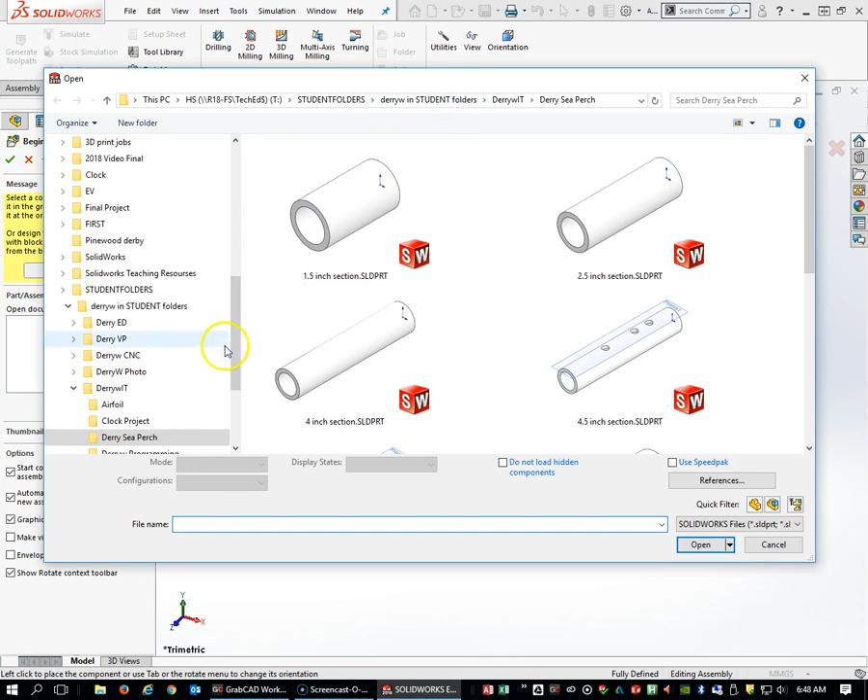So we're going to hit the Browse button and find our folder in our student folder. Get to your student folders, find your name, and find your IT folder and your Perch folder, and hopefully you've stored everything and named everything appropriately within this folder. Alright, the first piece that you bring in is going to be a base fitting, or base part rather.

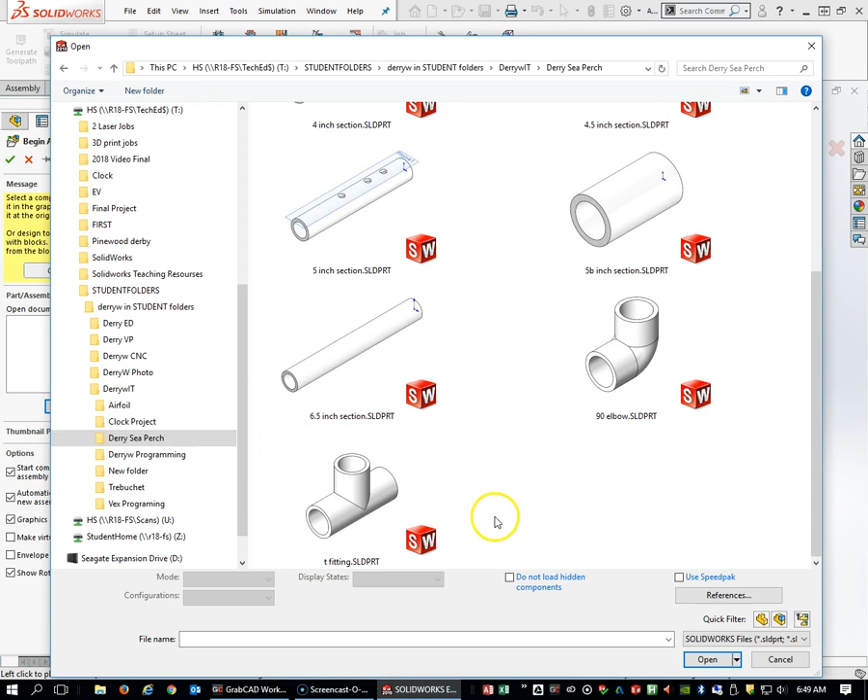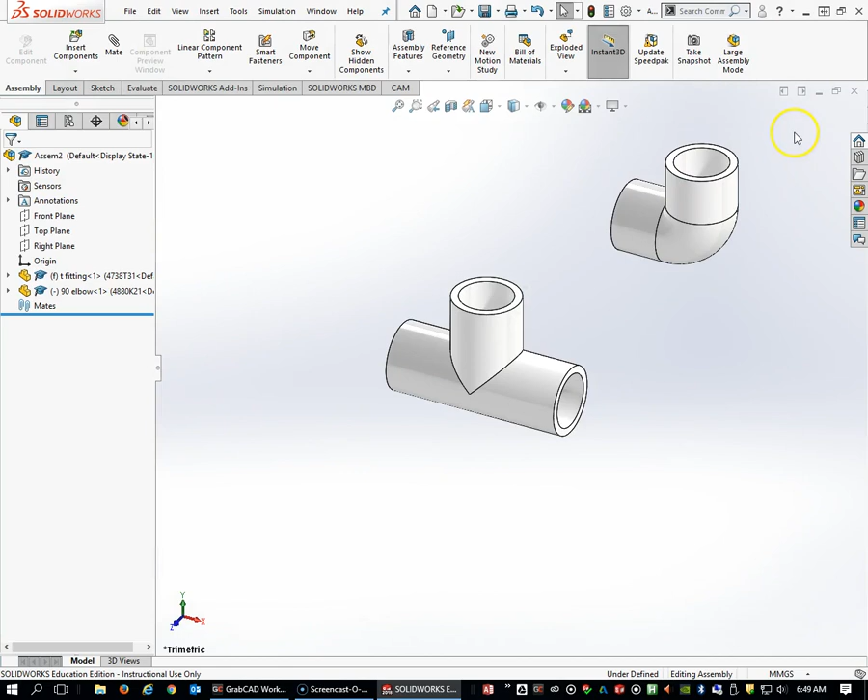I'm going to go ahead and pull a T fitting in to start. And if I hit this green check, it's going to place it right on the origin there, and I'm good to go. We can now bring in some additional parts, and to do that, if we hit the Assembly tab and hit Insert Components, we can select our elbow.

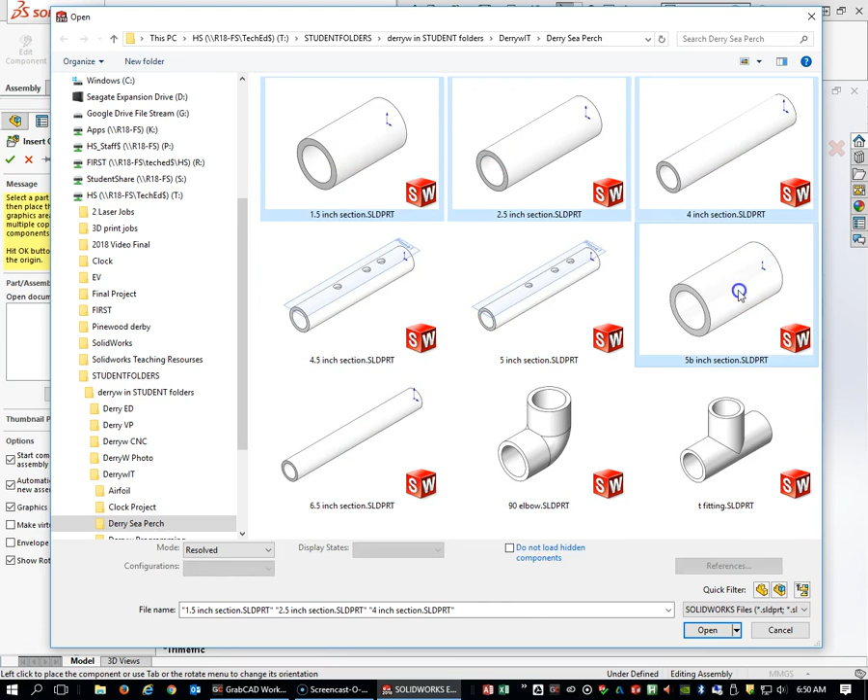And again, I'm going to click and hit the check, insert some more components. We need the 5-inch section. As a matter of fact, if you want, you can hold the Control key down and select all of these. And I'm going to hit Open.

And now when I click, it's going to pull each of these in. I should have all of my parts.

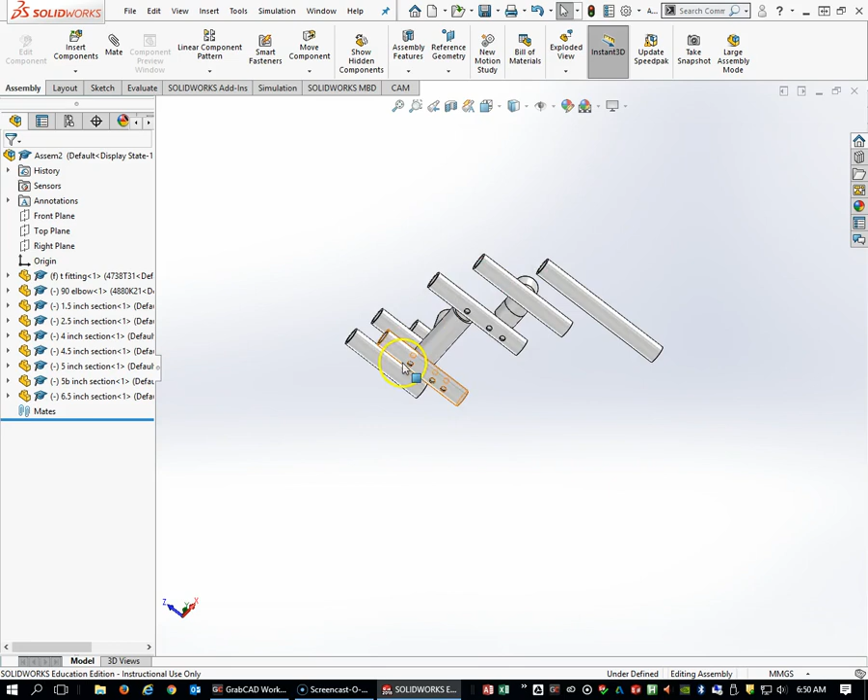Alright, let's take a look. I've got a 4.5, a 5. I think I may have accidentally pulled in the 5B, which I was giving a demo on, so I'm going to delete that one. If you accidentally pull something in that doesn't belong, you can delete it.

Let's take a look at the list to make sure that we have everything that we need, and I'm going to compare that to our PDF. Suggest, if you haven't done so, to go into Canvas and download your Perch PDF so we can see what this thing's going to look like fully assembled. This picture here shows us all of the parts that we need and where each of the parts goes, so I think it'll be easy for us to use.

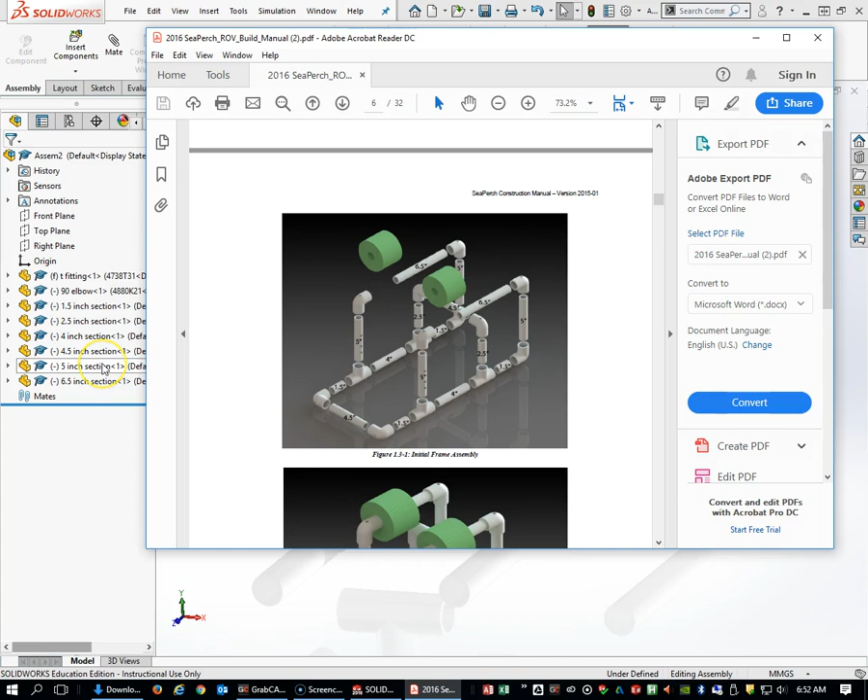So we have 1.5-inch parts, I have those. We have 2.5-inch parts, I have those. We have 4-inch parts. 4.5-inch parts are these, and then we have 5s. There's two different 5s. We have 5s with holes and 5s without holes.

I'm not sure I did that. And then we have the 6.5. So we may need to make another 5 without the holes, and I can show you how to do that if need be. Alright, so it's important that when you created these parts you name them correctly, because it's going to make the assembly go that much easier.

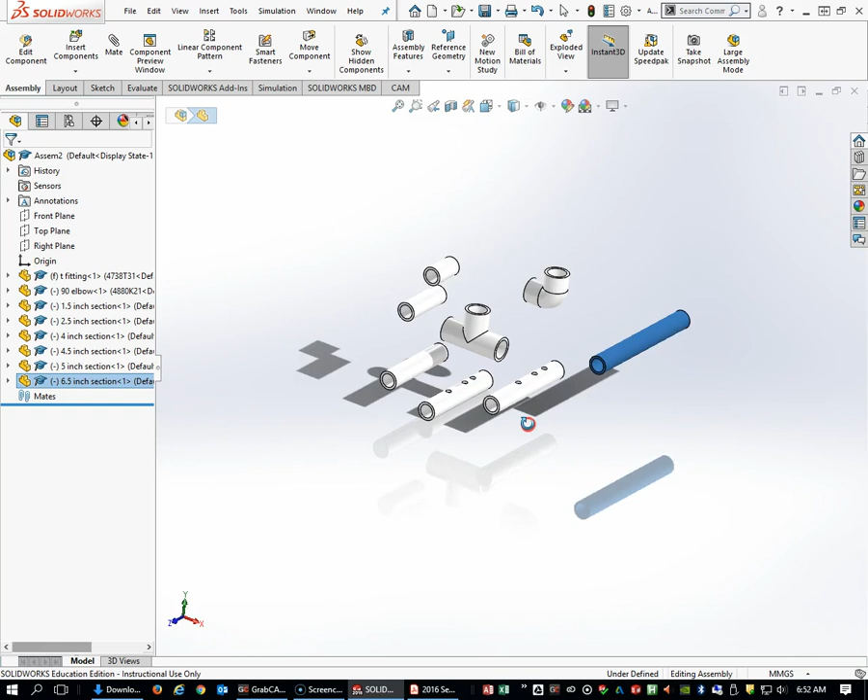Alright, going back to, let's start with these T's on the bottom. We're going to have 1.5 inch, a T, a 4, a T, an 1.5 inch. So let's go ahead and build that and see what that's going to look like.

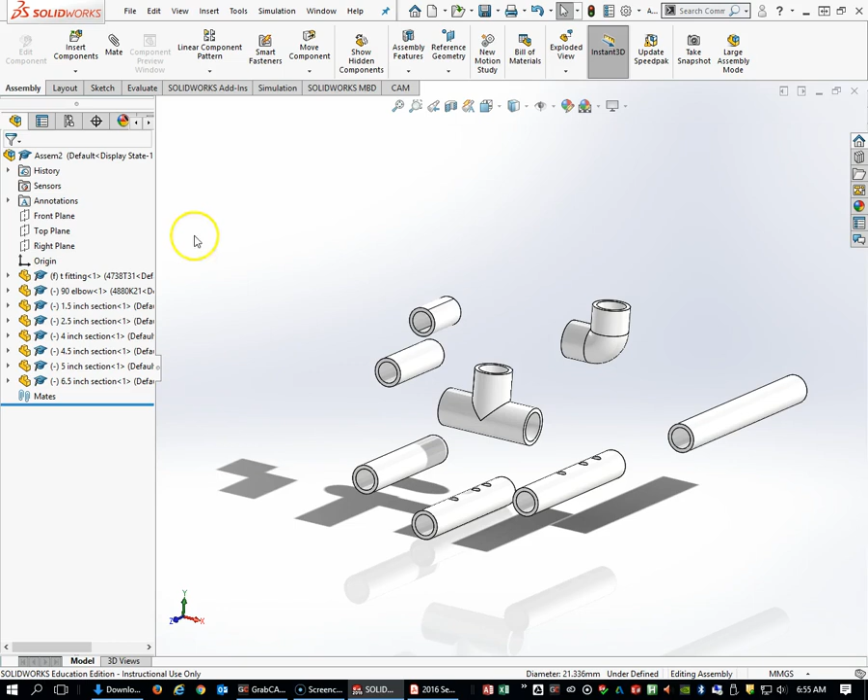Okay, you're going to go to the Mate command. Make sure you have nothing selected. You can hit the Escape key. And we're going to go to the Mate command, and once this comes up, Solidworks will automatically understand in most cases what kind of mate we want, so we don't need to necessarily select them.

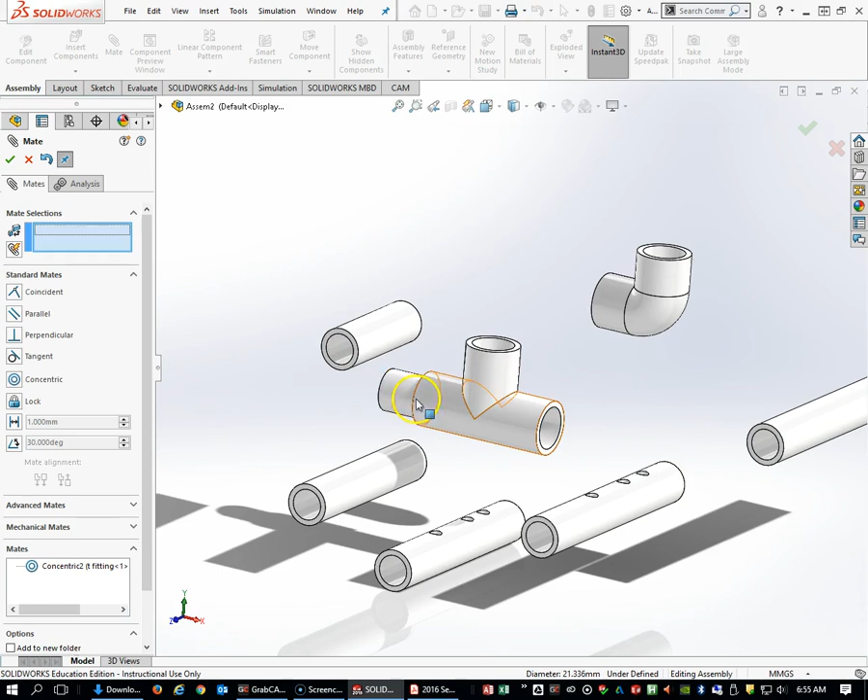If you see here, I've got, make sure this is cleared. If I select the outer part of this 1.5-inch section and then select the inner part of this, it automatically makes a concentric mate. So we're going to hit the green check here or here, either one. I'm going to select this one. And you can see that this part is now restricted to be concentric with that.

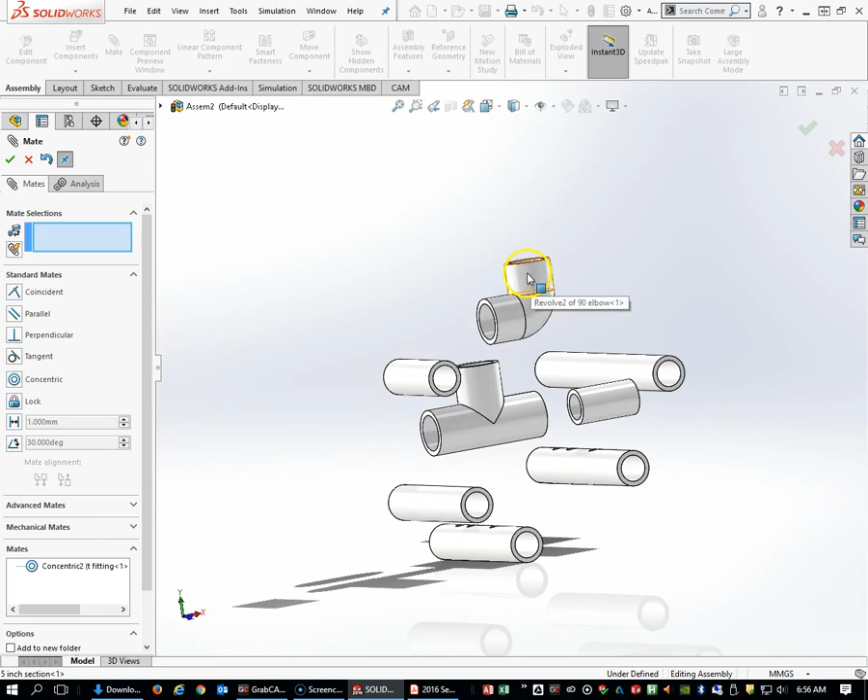Now inside here, there is a little stop in this fitting, and we can mate that surface to this surface here. Now for those of you who are new to SolidWorks, you should spend a couple minutes with the center button of your mouse, the scroll button. If you roll it in or out, you can zoom in and out on things. All right, and notice wherever I put my cursor, that's what I zoom in on.

Okay. If you hold that same button down and you rotate left to right, you can spin it in this manner.

If you hold the button down and move up and down, you can spin it in this manner. So a little bit of practice with that center mouse button is going to make you much more efficient at building assemblies, because you're going to need to rotate this thing back and forth.

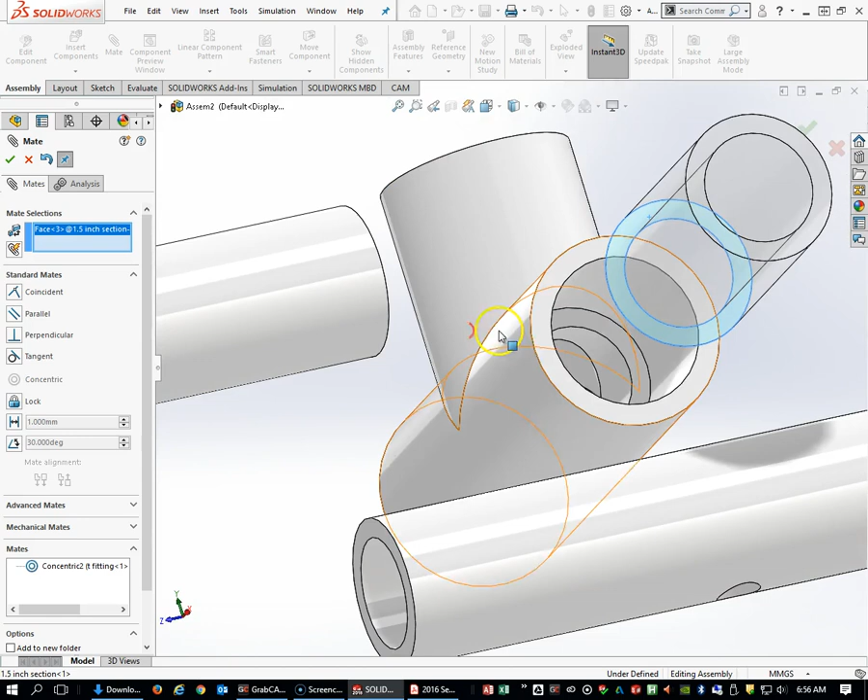Again, I've got this cleared. I'm going to come in here and grab this face, and I want that face to bump up against this face inside here. Okay, and I'm going to hit OK.

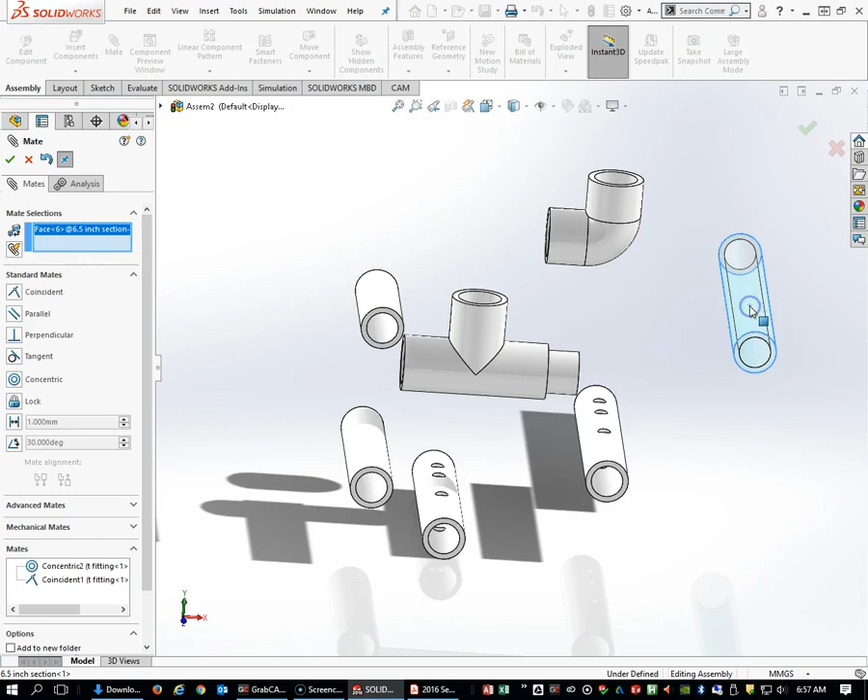All right, now I'm going to grab one of the 4-inch sections, which I believe is this guy. Oop, not that one, clear that. Oops, not that one, where is it? You know what? Clear out of here. Do I have it? There it is, okay. Go back to mate, clear that out. I want this section.

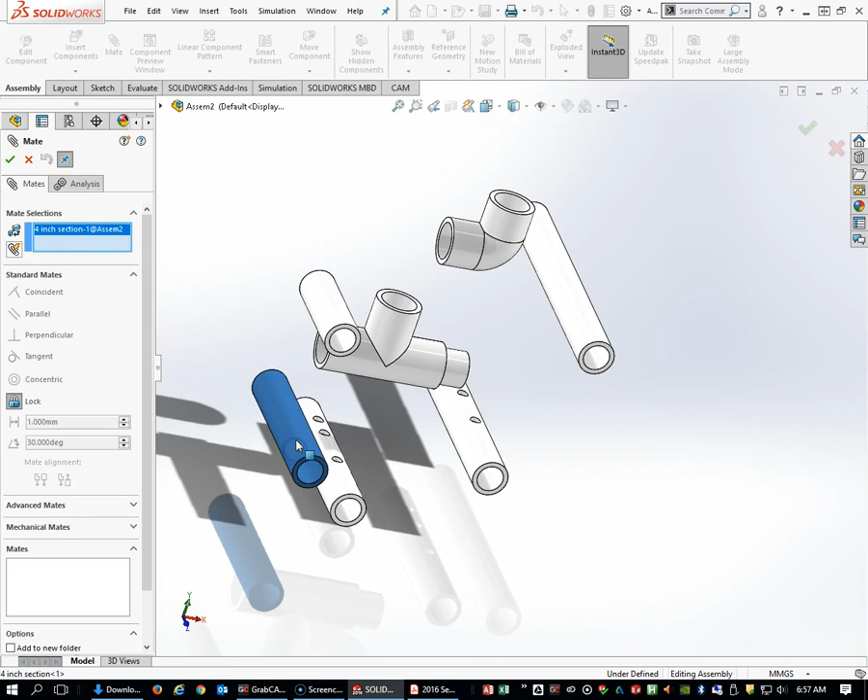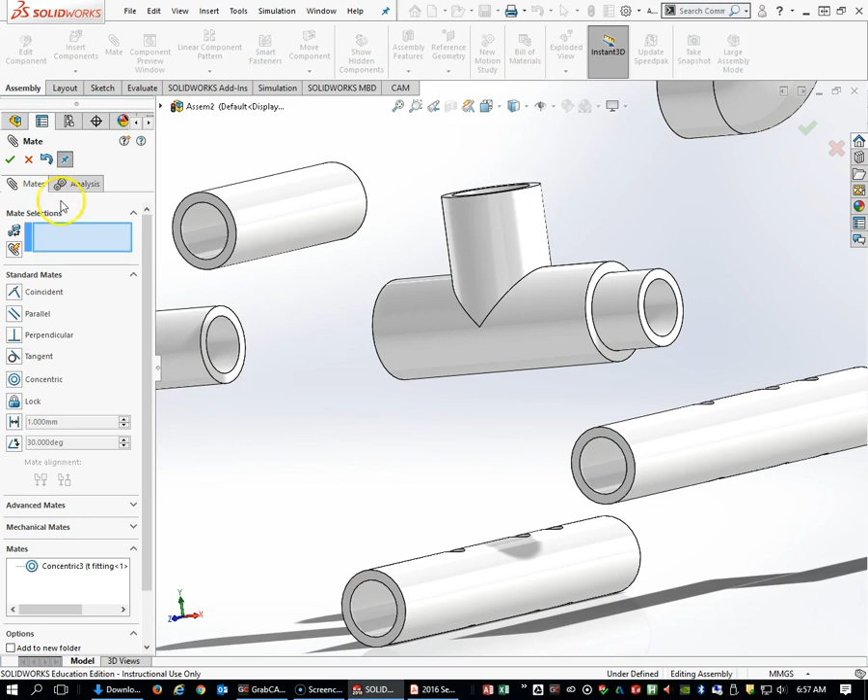Try that again. So I'm going to go ahead and tell it concentric. I'm going to select this guy. Go to here, hit OK. Once again, we want to mate those two faces. So I'm going to select this face, hit OK. Now you can see from our PDF document that we need more T's and we need more elbows.

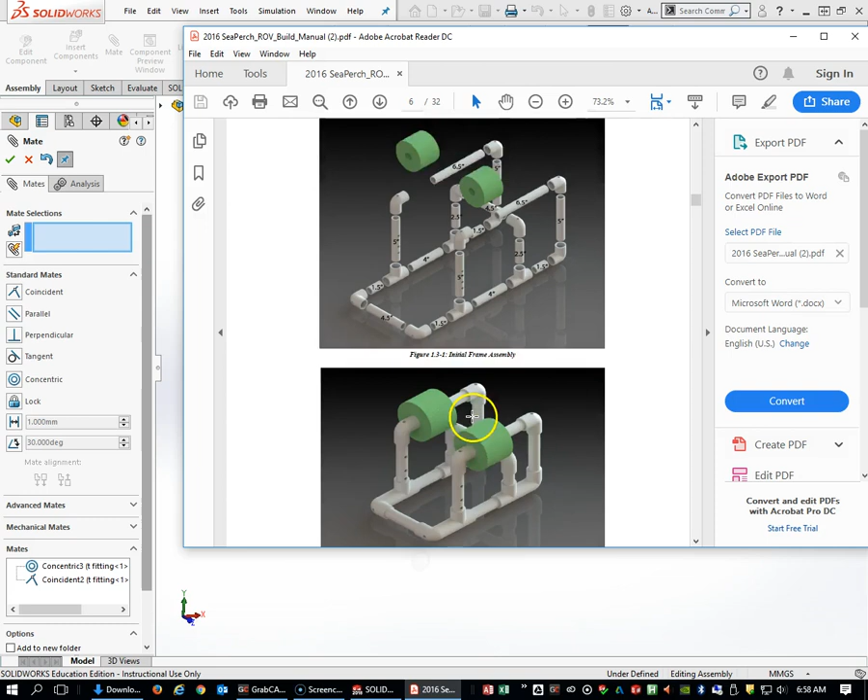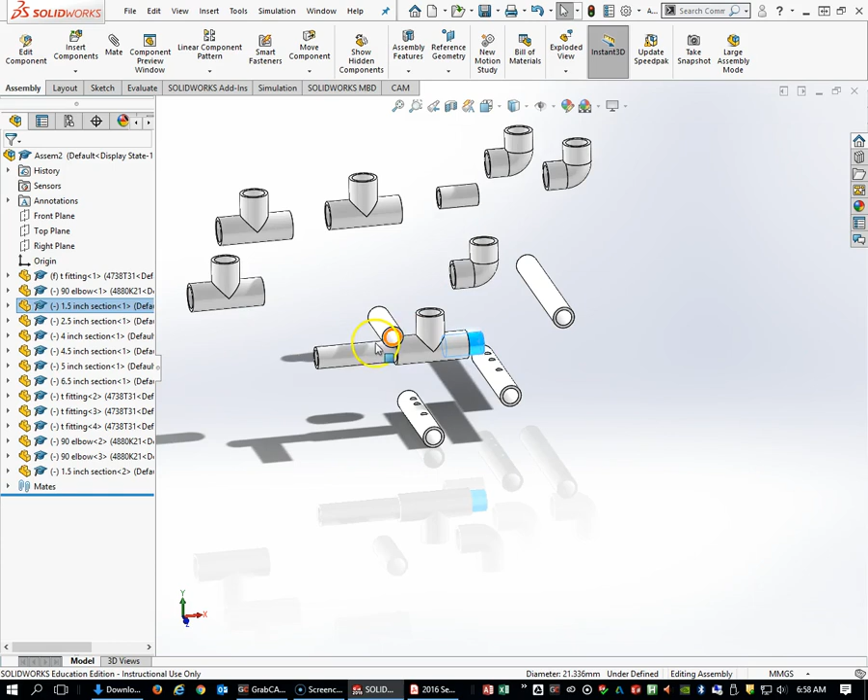Very easy to create some extra T's, I'll show you how that goes. Get out of my mate command for a second. If I hold the control button down and then click and drag at the same time, I can pull in a few more T's. I can do the same thing with my elbows, and with these, because we're going to need more of these 4-inch and 1.5-inch pieces. So just click on them and drag, and we can make as many as we need.

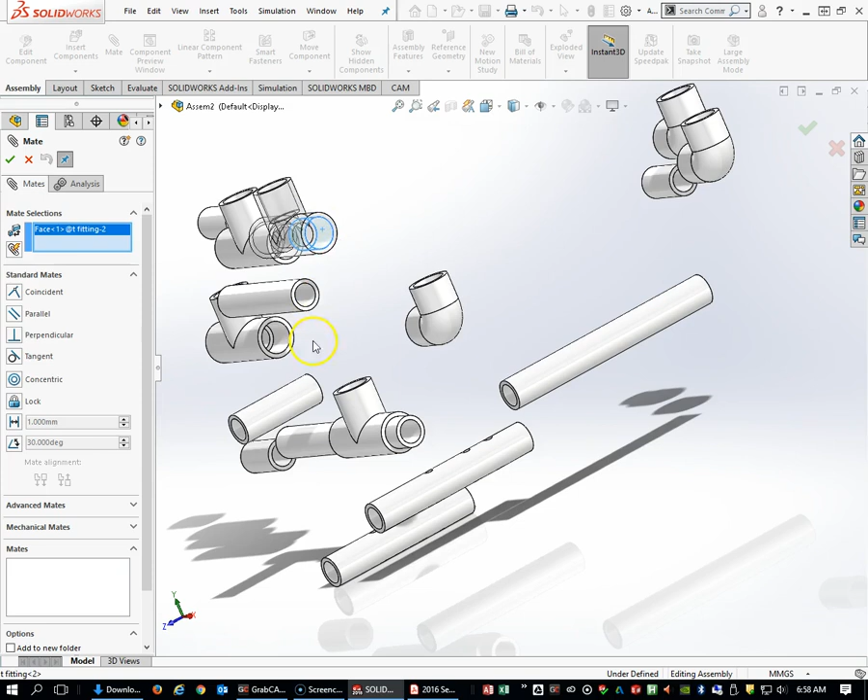All right, let's go back to putting things together. So I'm going to hit the mate command. I'm going to select this T. Select this, it's going to do a concentric mate. Once again, we want to mate up those faces. So I'm going to come inside here and select this.

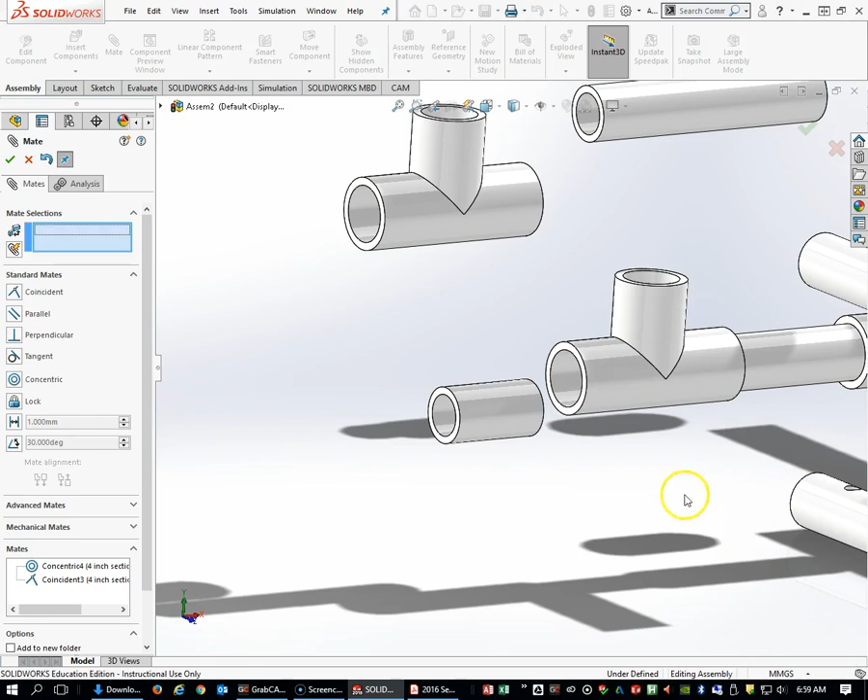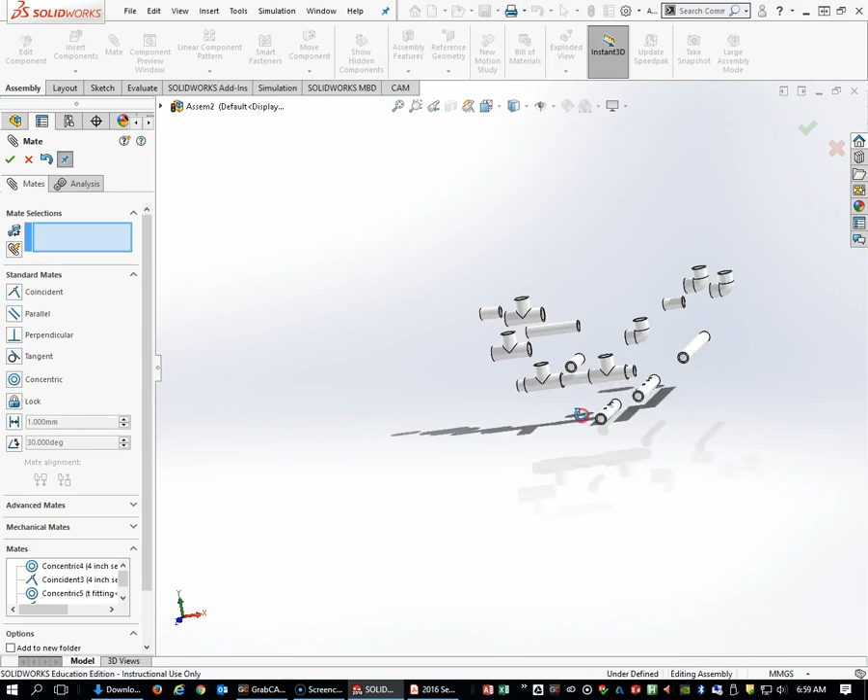And this. Looks good. We need another 1.5 on the end. So I'm going to select this and this. Make those concentric. Pull this guy out and select these. Hit OK. Now you're going to need to make 2 of those, one for the left side, one for the right side. So we've got that part set.

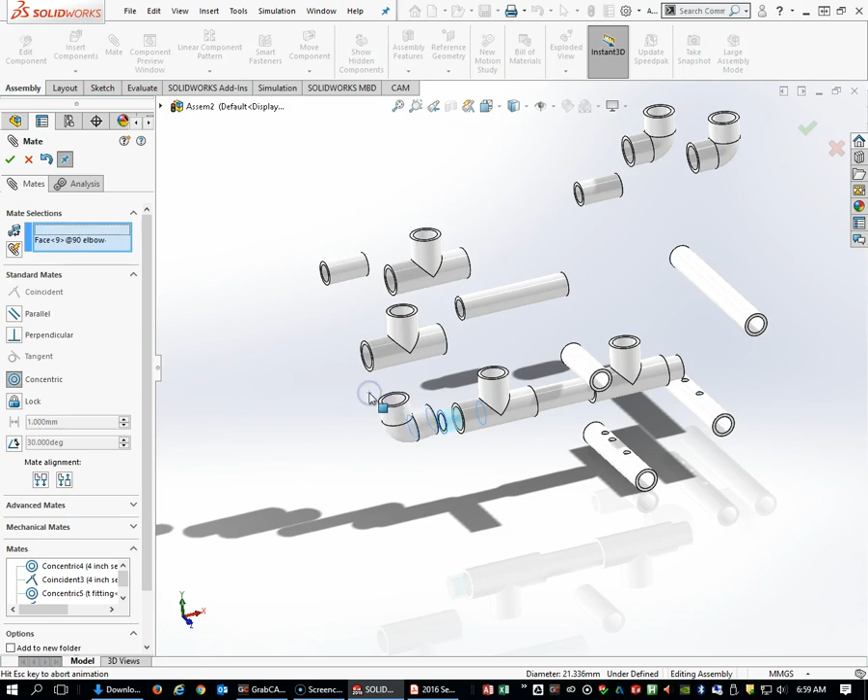Let's go ahead and put a corner on here and work our way around. So I need one of these elbows. I'm just going to drag it, click and drag it over here, and select this and this, and it's going to make those concentric. Again, we want the faces here. And when you build this thing for real, you're going to try to push these fittings together so that they line up nice and tight.

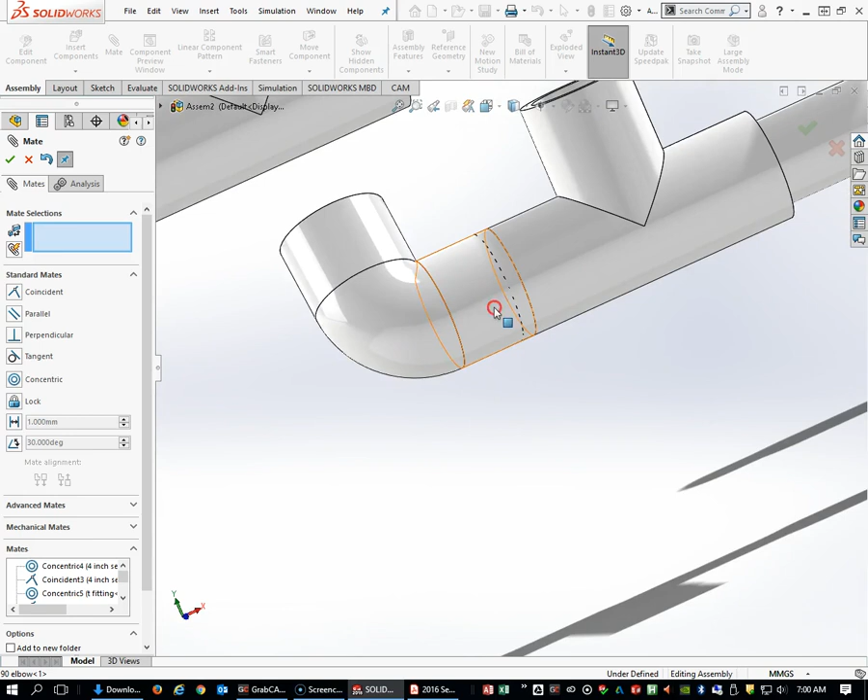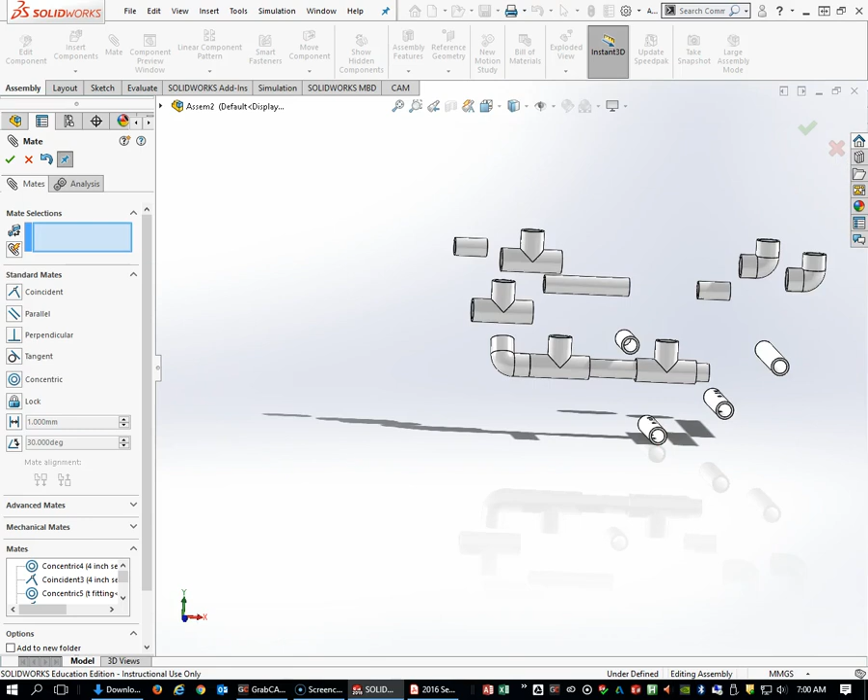Oops, looks like there's a little bit of overlap on that T fitting. I'm going to undo that. Control Z, just like most programs, is a good undo. Instead, I'm going to go ahead and select this face this time and this face, because they're not going to go past each other in the real world. Just going to butt those 2 up. Hit OK. And if you look at the PDF document down here, you can see that these pieces are butted into each other.

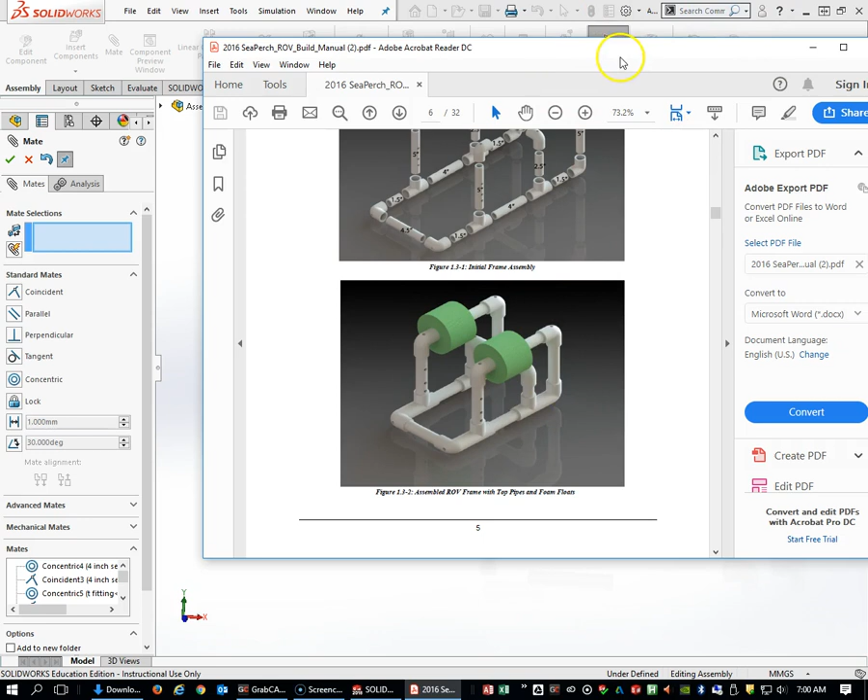So we're going to put another one of those 90s right over here. Select the cylinder, select the inside of the elbow. It'll put a concentric mate on. Hit OK. Select the face of the T, face of the elbow, and we're all set.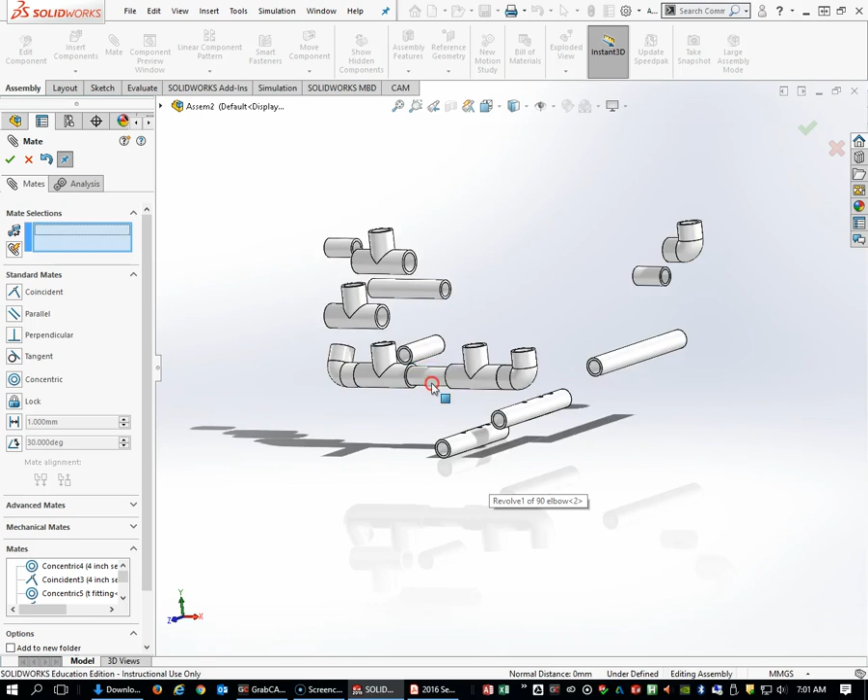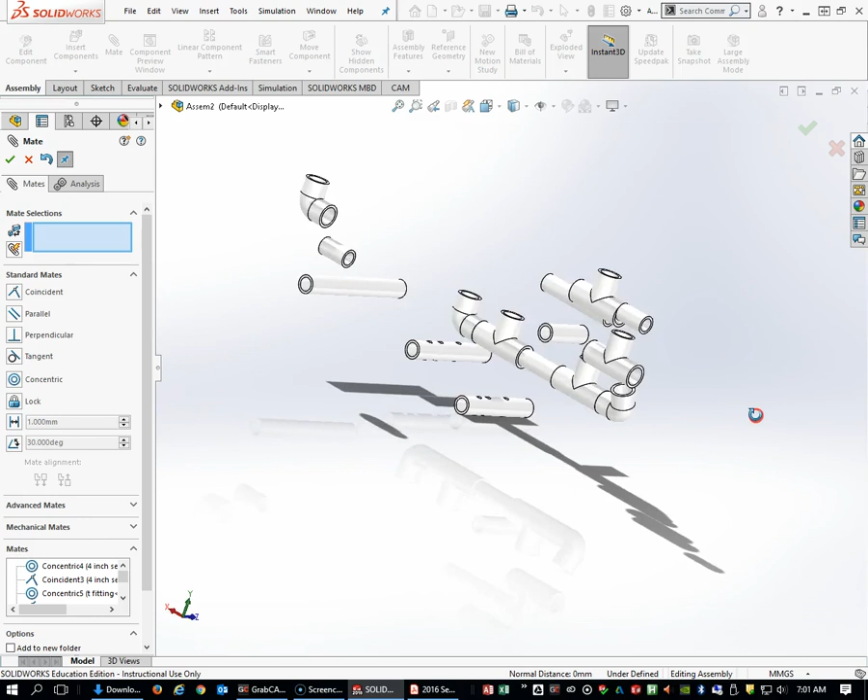We need to put a 4.5-inch section into here and then build a similar feature on the other side. We also can start going up. I'm going to cut this video here and see if you guys can figure some of this out on your own. You've got this to work with. Do your best to make sure that the ends are correctly oriented.

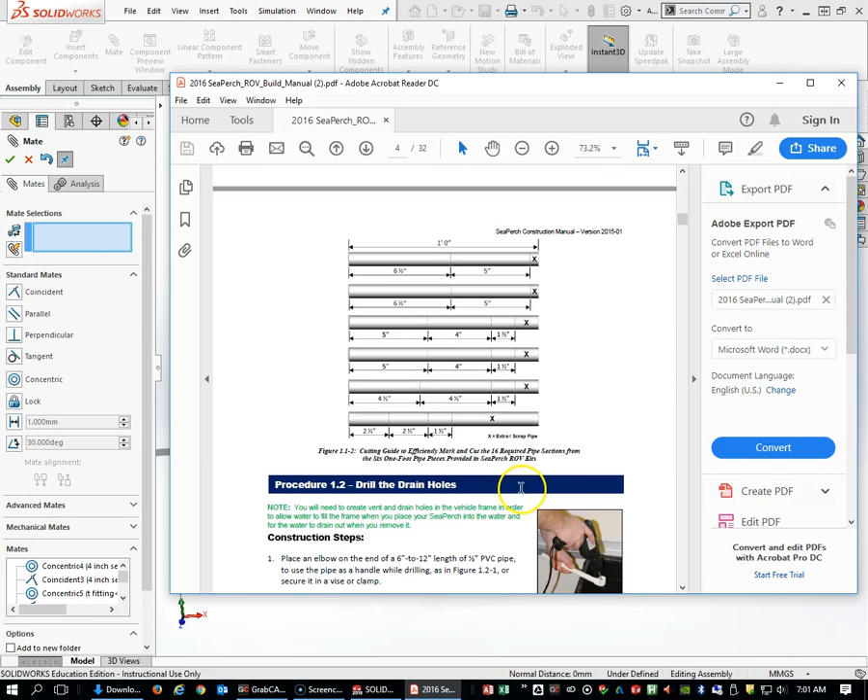Maybe I'll give you one quick sneak peek on how to do that. I want to make sure that you can see here that the holes are on the lower side of these 5-inch pieces. So why don't I do one of those just to show you how to reorient one of those, and then I'll set you off on your own to do this.

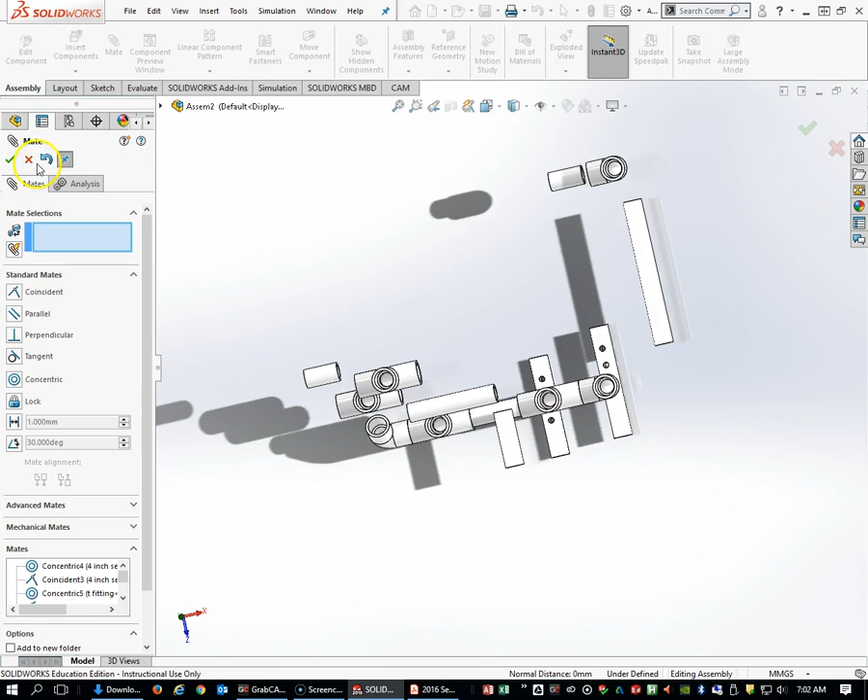So as we look at this part, I'm going to get out of the mate command for a moment. This part right here is my 4.5, this is my 5, and I would say that the holes are closer to this side, and I want them to be lower in this piece. So I'm going to hit escape, deselect that.

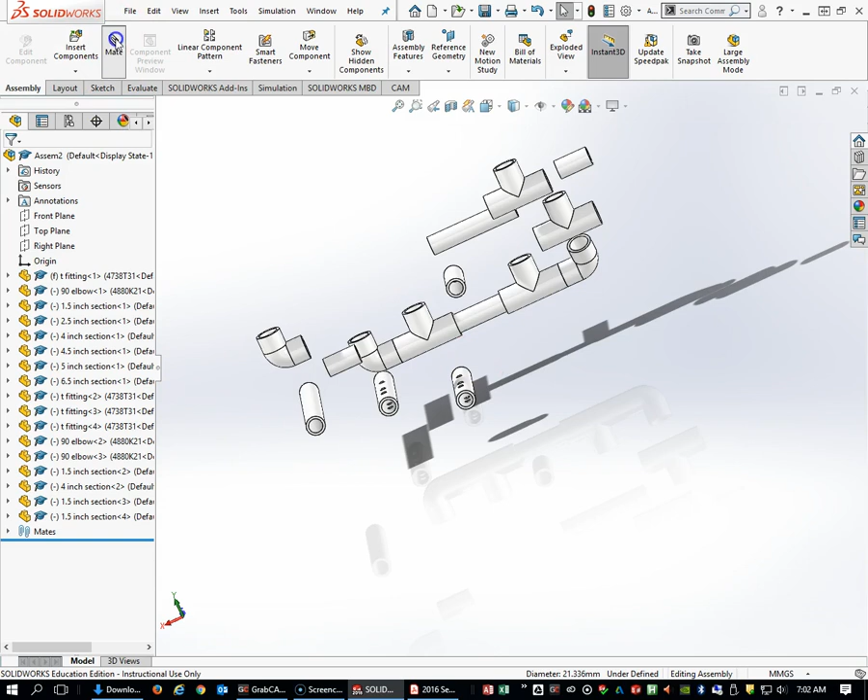I'm going to come back to my mate command, and I'm going to go ahead and select this cylinder again and select one of these T's. Now once I hit the check box, you can see that in my case I did get the holes on the lower side, but if I didn't do that...

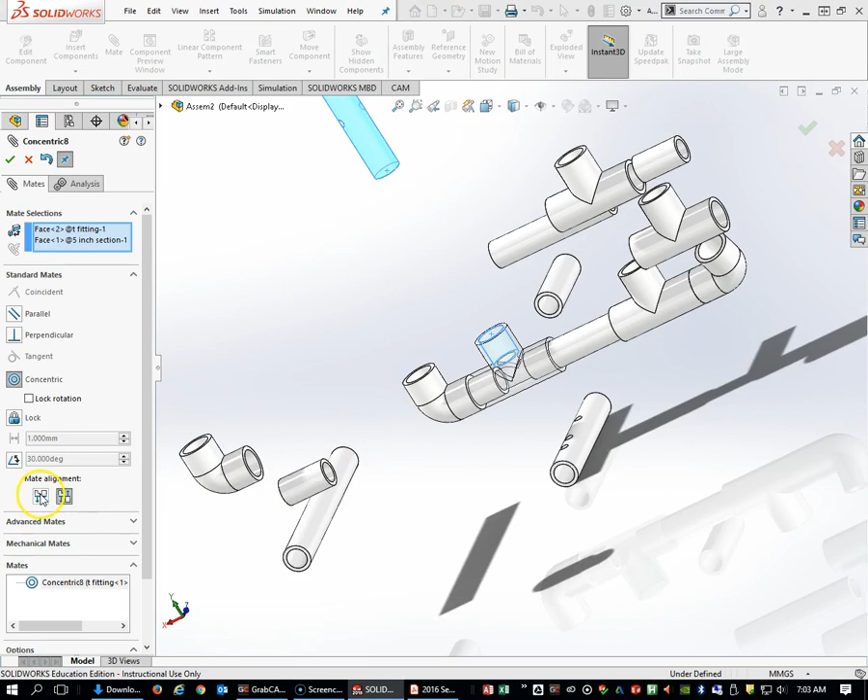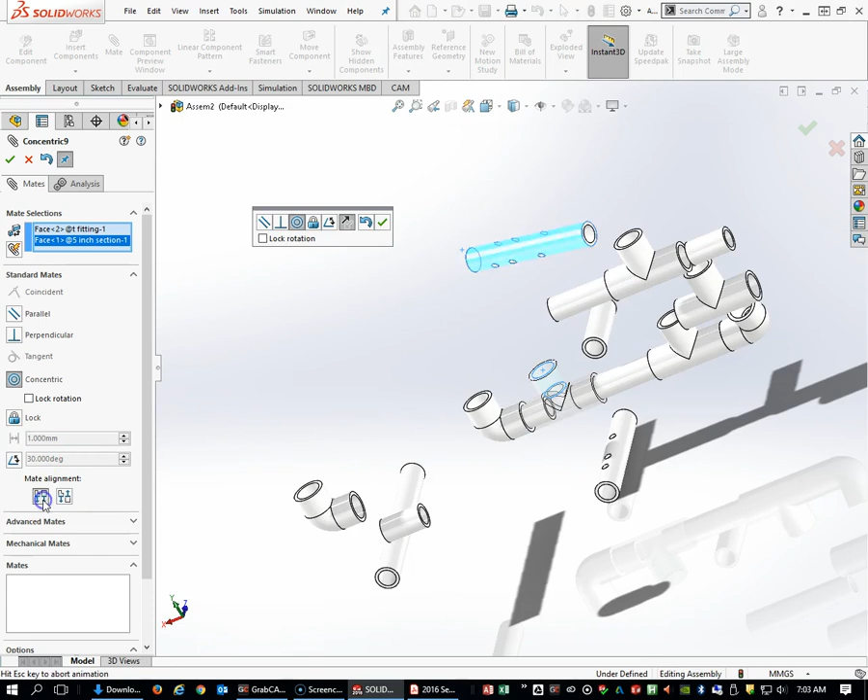There's a way for me to flip that. Let me go ahead and delete that and start from scratch. If I select this and I want these to be concentric and it puts it in upside down, I'll show you how we can flip it back over. I'm going to select those two. Before I hit the green check, let's say mine was upside down. If I hit this box, it's just going to flip it over for me. Now I've got my holes close to the top. If I flip it back, it got my holes close to the bottom. So you can change the orientation of that.

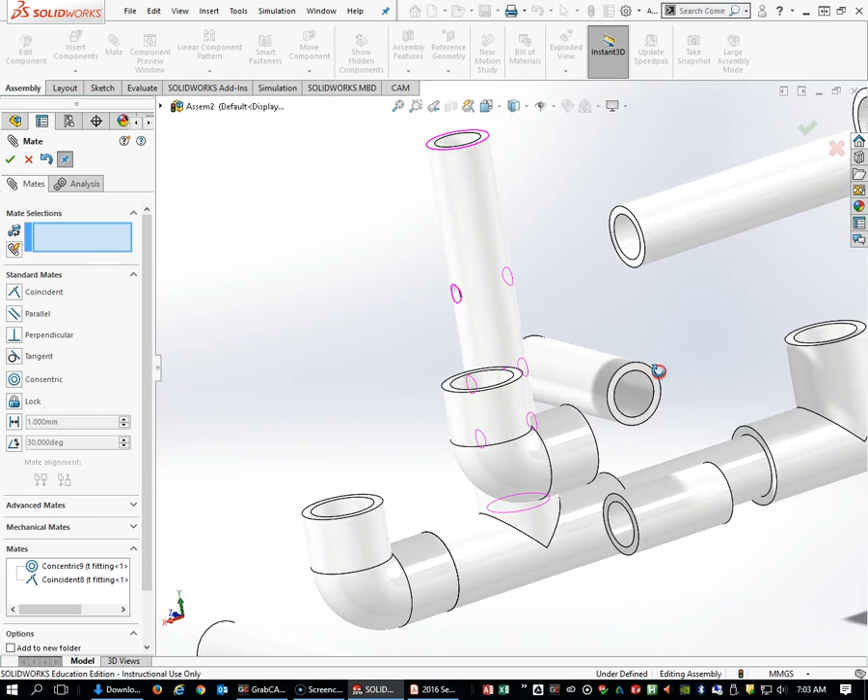Alright, next we want to go ahead and mate up these faces. Okay, and the final trick is going to be, how do we get the holes to line up in the correct orientation? And for this we're going to need to use some reference geometry. So let me show you what that looks like.

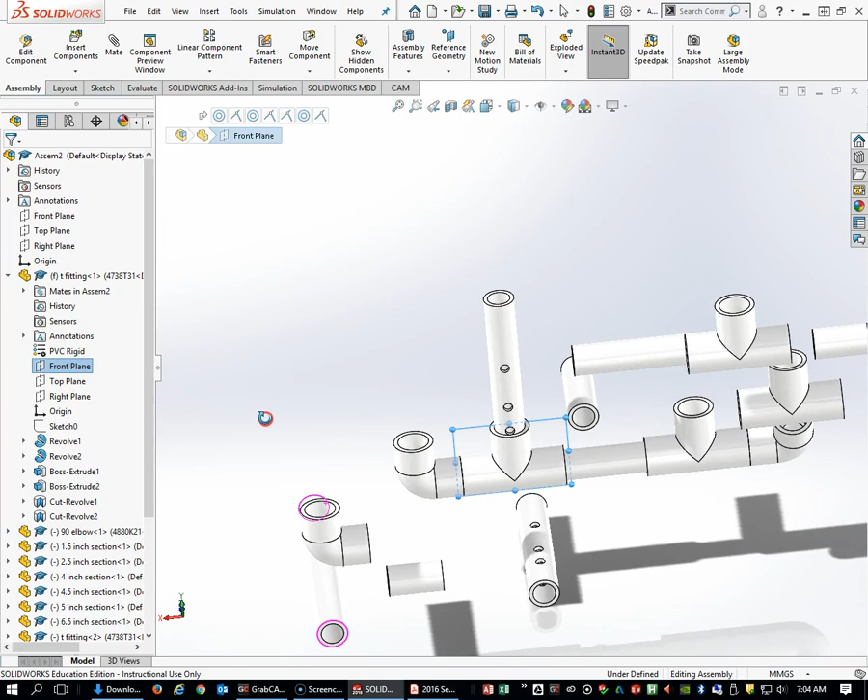Going to come into our T, this T right here, and notice that there's a plane in here, my front plane. And that front plane is what I'm going to use to mate up with a plane in this part. So if I click on this part, that's this 5-inch section here. If I open this up, I can see that plane isn't going to work. That one would work nicely. So I want to mate the top plane of this 5-inch section with the front plane of my T.

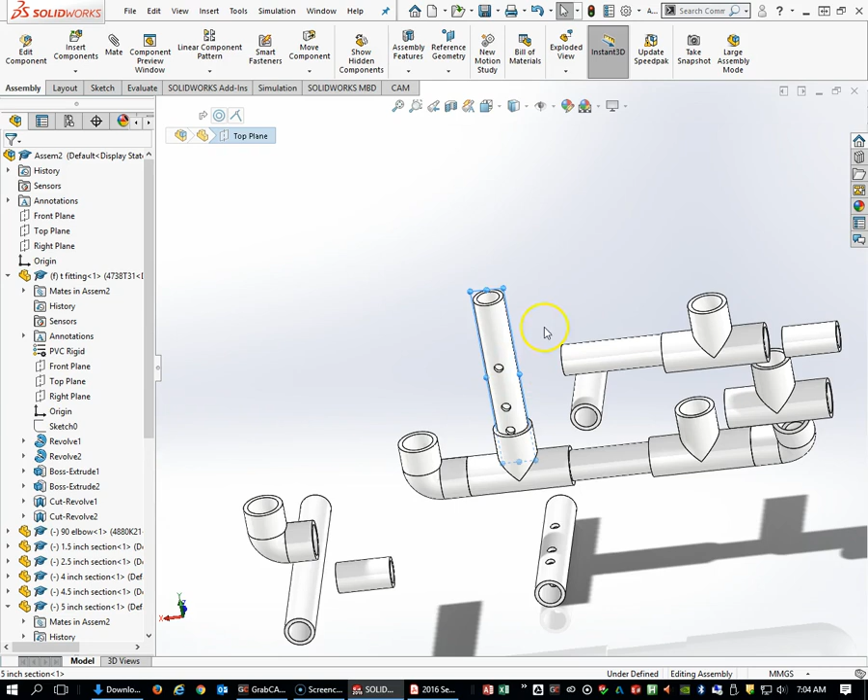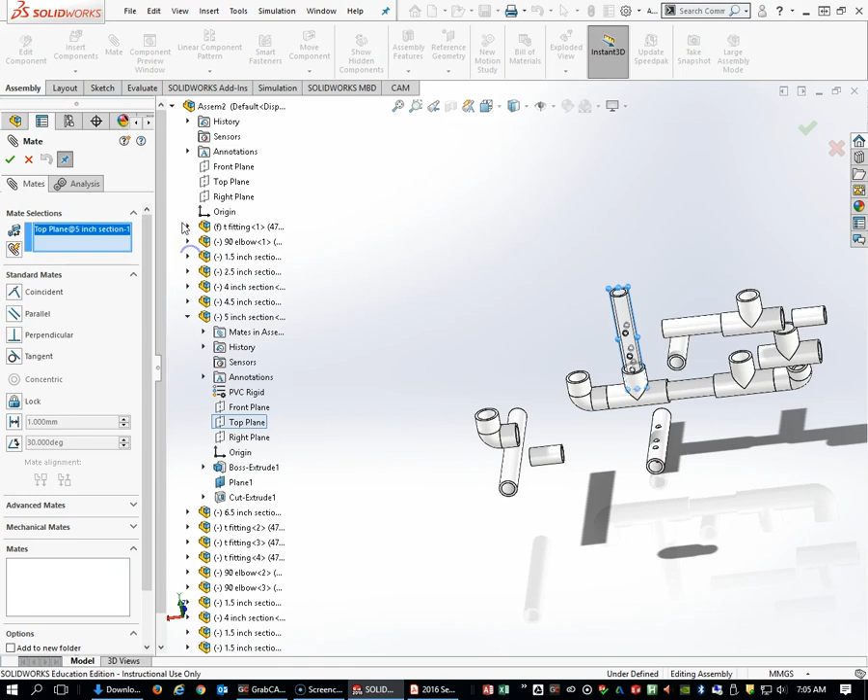So in my design tree over here, Feature Manager, I'm going to open up the T fitting by clicking this little caret. I'm going to find that front plane, and then I'm going to click on this part so I know which 5-inch section I'm referring to, because I have more of them. And I'm going to select the top plane. So I got to get back into my mate command. In order to find those now, I have to click on this caret, which opens up my feature tree again. Go back up to my... for my 5-inch section, I want the top plane, and for my T fitting rather, I want the front plane.

And if I hit OK, by clicking that green box, you'll see now that my holes no longer rotate and that I have mated those pieces together in a way that's going to lock them up.

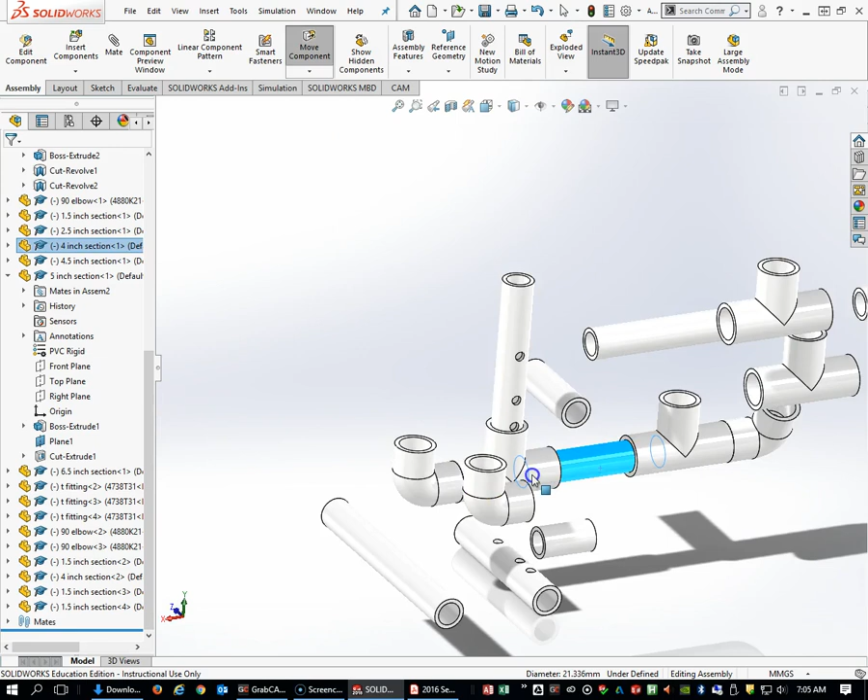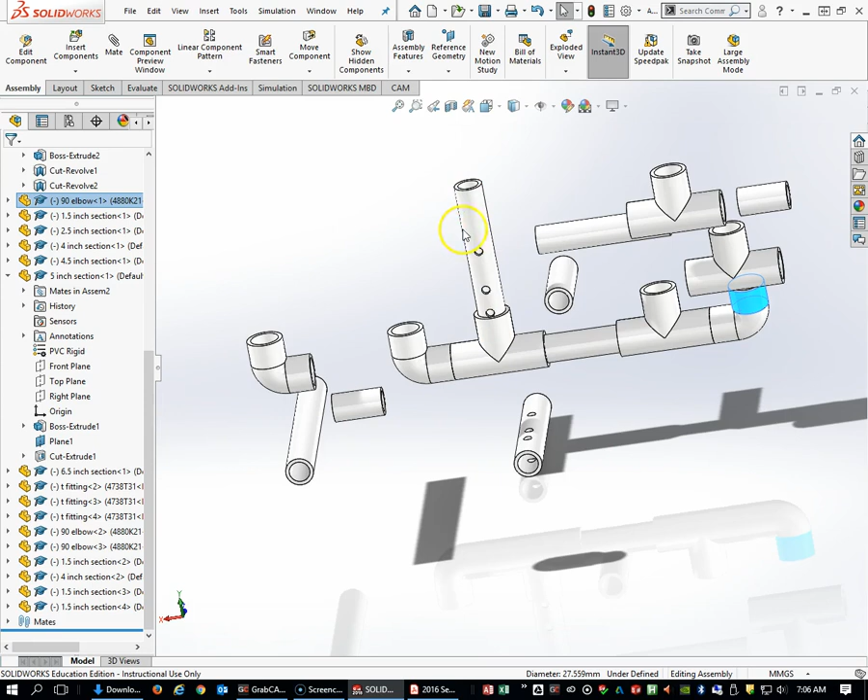Now, I guess I'm going to give you one more bit of advice before we move on, and that is, if you mate something incorrectly and it's stuck somewhere where you don't want it to be, you need to know how to undo that. Say I accidentally put this elbow on here and it was supposed to be a different part, or this was the wrong part. If you right click on a part and go to View Mates, which is the paper clip with the eye, it'll tell me all of the mates that are associated with that part, and you'll notice it also highlights the other features that I've mated it to.

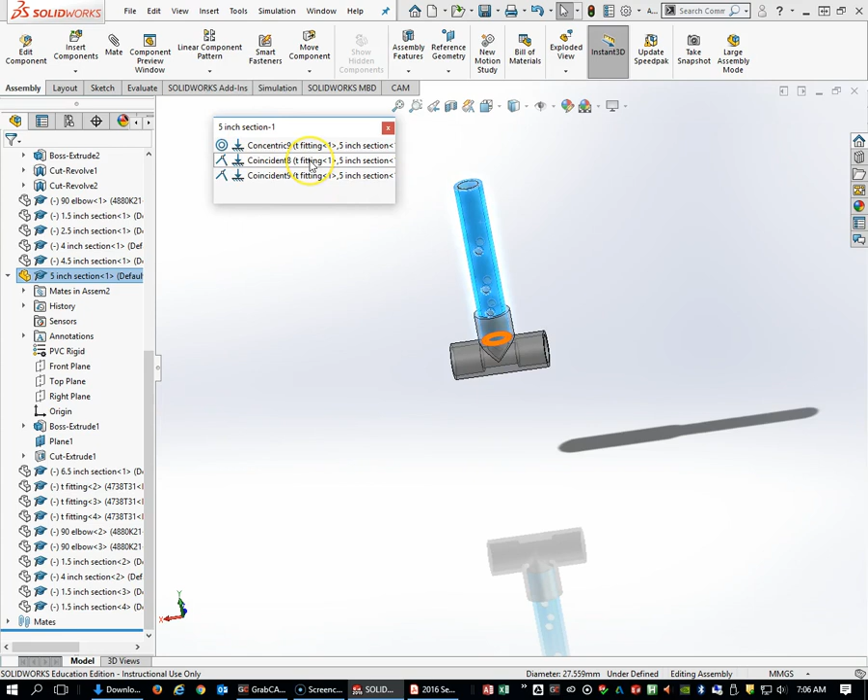So the first thing I did was create a concentric mate with that. The next thing I did was a coincident mate that put those two faces together. And finally, I made a coincident mate between those two planes, which allowed those parts to stay oriented without rotating.

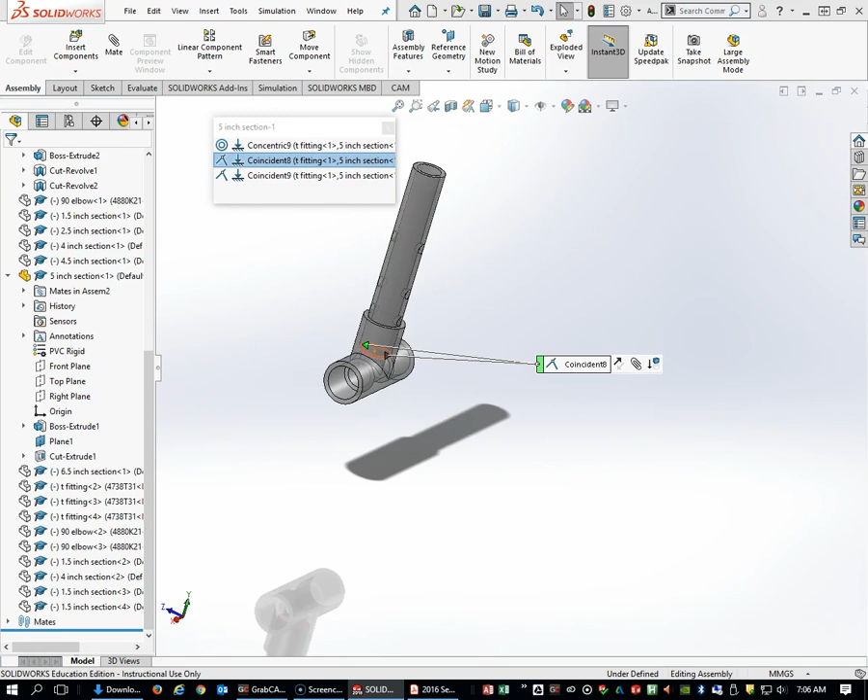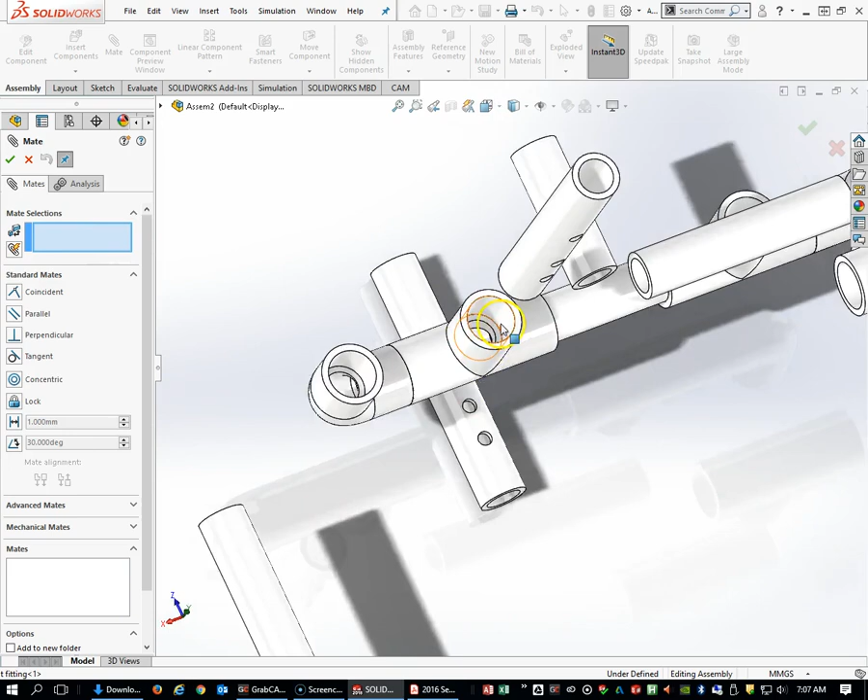If I wanted to get rid of any one of these, I can just right click on it and delete it. So if I delete this mate, I get a little warning here. If I say yes, my part now can come in and out. It still remains concentric and my planes are still coincident, so I can't rotate, but I can extend it in and out. I'm going to go back and put that mate back in by, whoops, make sure you clear that when you're starting, by selecting that face and...

All right. Doing assemblies is a little tricky at first, so don't get frustrated. But once you get the hang of it, it's kind of fun. It's kind of like playing with Legos.